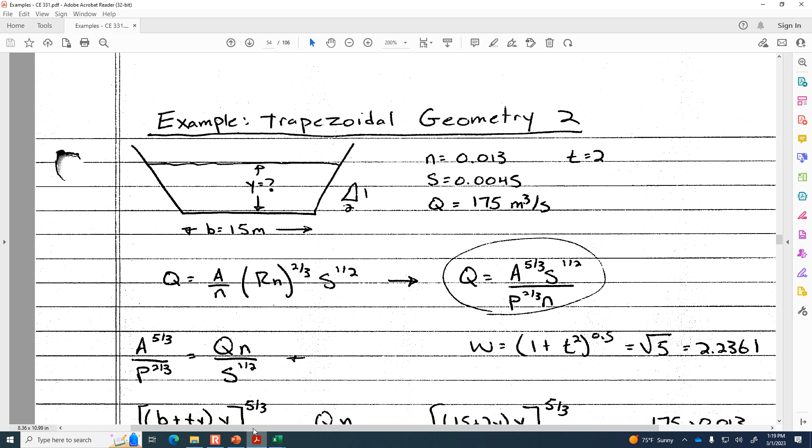14.9 — that's what I got as well. So 14.966 cubic meters per second.

Now on the subject of units, this formula is not dimensionally homogeneous. Do you remember what that means, dimensionally homogeneous? It means the units on the right-hand side of the equation are the same as the units on the left-hand side. This is not — this is an empirical equation.

It's not fundamental. Empirical means it was based on a lot of observation and calibration, and a fitting factor n. Because if we look at the units, we've got meters squared taken to the 5/3 power divided by meters to the 2/3 power, but there's no time parameter there. There's no seconds in slope or in the n value. But yet Q is going to have units of inverse seconds in the denominator as the time parameter.

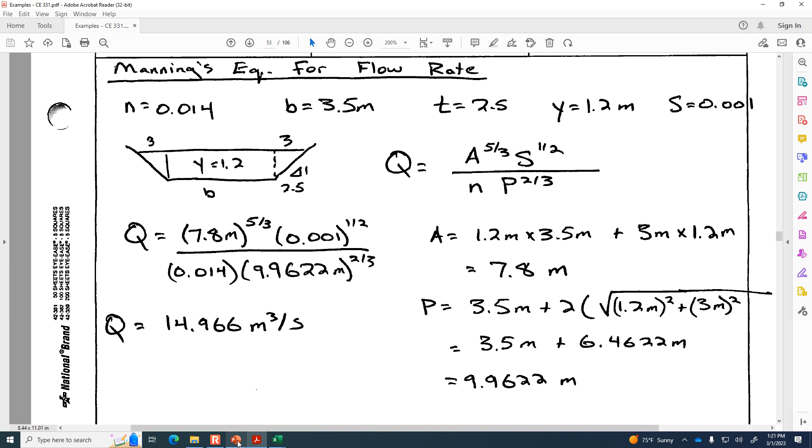So it's okay, it's not dimensionally homogeneous, but we do need to make sure that we're putting in, for example, an area up here where it's going to go to the 5/3 power. And if you've got traditional units, you'd need that 1.486 coefficient at the front if you're using units of feet. Any questions on applying Manning's equation into a trapezoidal channel here?

Now this is the easy kind of problem, because we were solving for Q given a depth — the unknown was on the left-hand side of the equation. It's a little more tricky when we're solving for Y, because the unknown depth is in two different places: in the area term and also in the wetted perimeter term. And especially because if you look at the formula for area, Y appears multiple times. So it's not an impossibility, we just have to be careful when we're putting it into our solver.

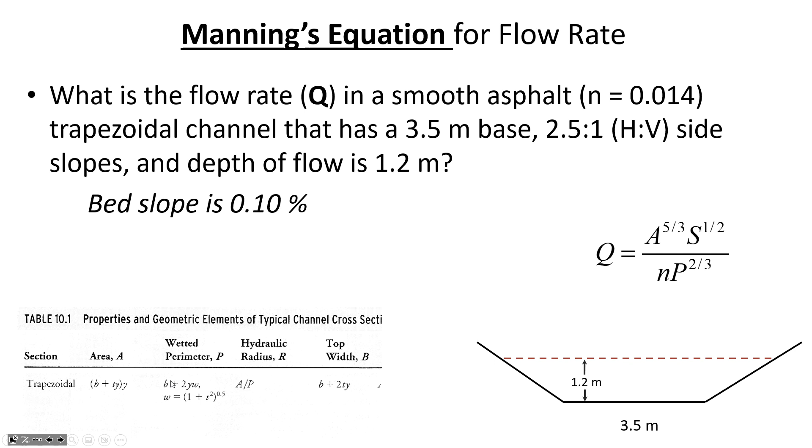I emailed you yesterday a link to a video, and if you're using the Casio calculator, I'd recommend you review it. It's only 4 minutes long, and it'll step you through the process of how you can use the Casio calculator to solve for an unknown depth. What makes it a little tricky with the Casio is that it doesn't have a full keyboard of all the letters of the alphabet. One of the things you have to do is map different variables.

So for instance, on my calculator I can use Q, B, T, S - it has all those letters, but the Casio only has a few of them. So you have to say, well, I know that I use Q as flow rate, but Casio doesn't have a Q on the keyboard, so I'm going to assign it the variable A to represent flow rate. Once you construct the equation using the variables you do have, you can put in an actual number for all of them except one, and solve for the unknown variable. That's what a solver will allow you to do.

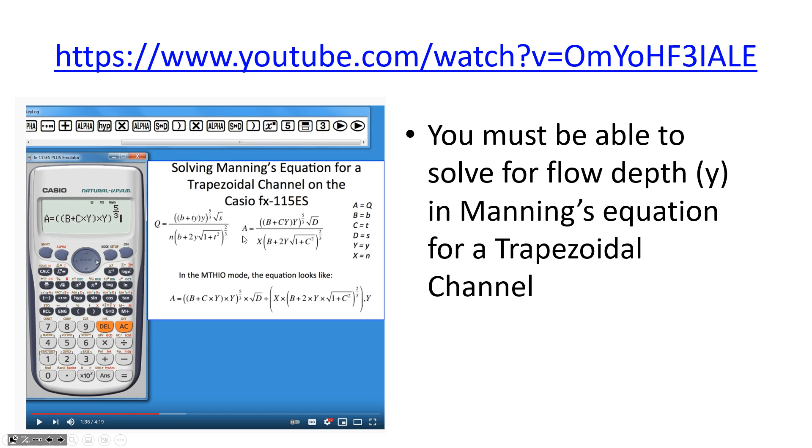We're going to look at a kind of solver today. We'll use Wolfram Alpha just as an illustration, but you'll need to do it with your calculator for an exam and maybe even for a quiz before the exam. So whether you're using a TI, a Casio, an HP, or some other kind of calculator, you need to be able to solve for the unknown depth in your solver.

Okay, so again, here is Manning's equation, both in terms of SI and British gravitational units. Finding the unknown depth is oftentimes what we're trying to solve for with Manning's equation.

For instance, you'll know a flow rate, and you're trying to figure out how big the canal should be. If you're designing an irrigation canal, and someone says, well, I need a certain flow rate, maybe 5 cubic meters per second going through a canal, and I want it to be 3 meters wide - how deep would the flow be? So that's a pretty standard problem, solving for the depth.

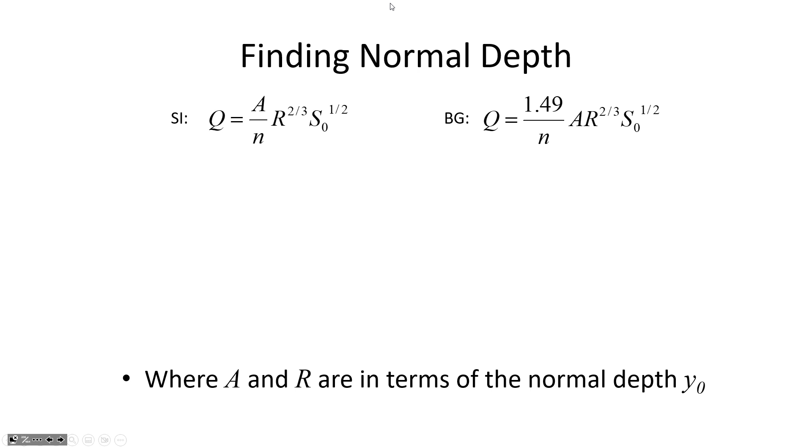One way for us to do it if we're solving with Excel is to rearrange Manning's equation so that all of the known factors are on one side and all of the unknown factors are on the other side of the equation. Then we iteratively guess for the unknown depth until the left-hand side of the equation equals the right-hand side.

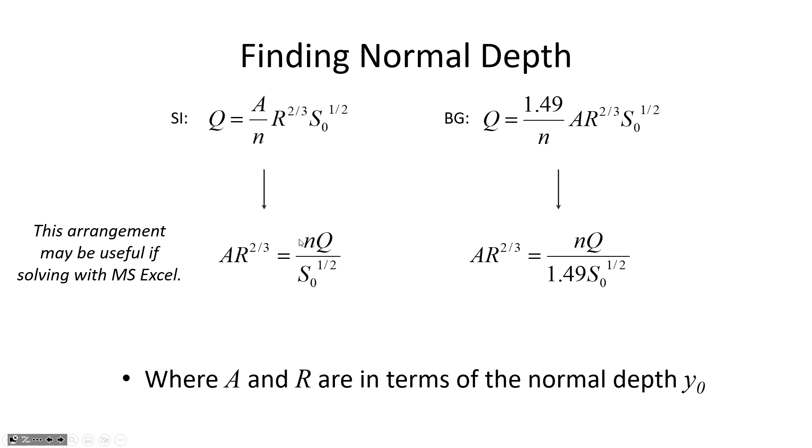So in addition to using Wolfram Alpha to solve Manning's equation today, we're going to look at an example where we'll use Excel and rearrange Manning's equation in this way, where all of the variables that depend on y are on the left-hand side of the equation, and the known factors like the flow rate, the roughness, the slope, all of that will be on the other side of the equation.

Okay, so here's an example where we're going to use a solver and also Excel to try and find out what is the unknown depth y, the normal depth. Assuming conditions are steady and uniform, what is going to be the depth of flow in this trapezoidal channel?

You can see 15 meters across the bottom, with side slopes of 1 unit of vertical for 2 units of horizontal, so T equals 2. Flow rate of 175 cubic meters per second, slope of 0.45%, and this must be made out of concrete because the 0.013 is a pretty typical n value for concrete surfaces.

Okay, so here you can see I've substituted in for a trapezoidal channel. This is what Manning's equation becomes when we've got a trapezoidal channel. So area, for example, is B plus Ty times y. Wetted perimeter is B plus 2y times W, where W is 1 plus T squared to the 1/2 power. We're going to put all of this into Wolfram Alpha given the known parameters we've got.

So let's put those on the board to begin with. We know that we've got a trapezoidal channel, and Q is 175 cubic meters per second. The slope S is 0.0045. The bottom width B is 15 meters. T is 2. n is 0.013. Let's see, what else is there? Is that everything? Yeah, all right. And the unknown is, what is the depth? What is y?

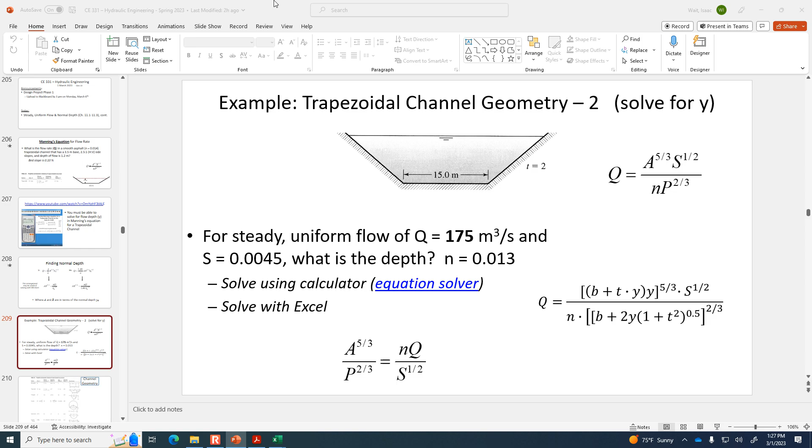Okay, so let me start up a browser here, and if you have a calculator and know how to put in this equation, then do that. If not, or if you just want to see how we could set this up in Wolfram Alpha, then you can follow along as I do that.

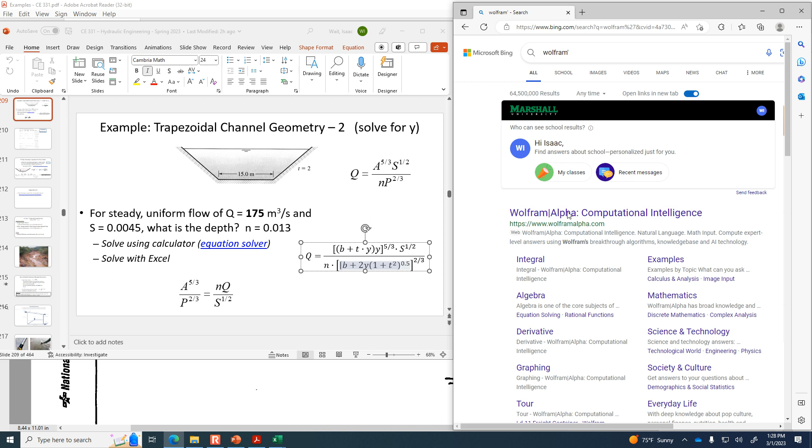I wish I could just paste this equation into Wolfram Alpha, but I don't think it's necessarily that easy. So let me do my best here.

So Q, 175, is equal to B, so that is 15 plus T, T is 2, times Y, our unknown depth, times Y again, taken to the power of 5/3, times the slope, which I know is 0.0045, to the power of 0.5. And then divided by n, so 0.013, times the formula for the wetted perimeter, which is B, so 15 plus 2 times Y, the unknown, times 1 plus T squared, so T is 2, so 1 plus 2 squared, and this term is taken to the power of 0.5. And then one last parentheses, everything to the power of 2/3.

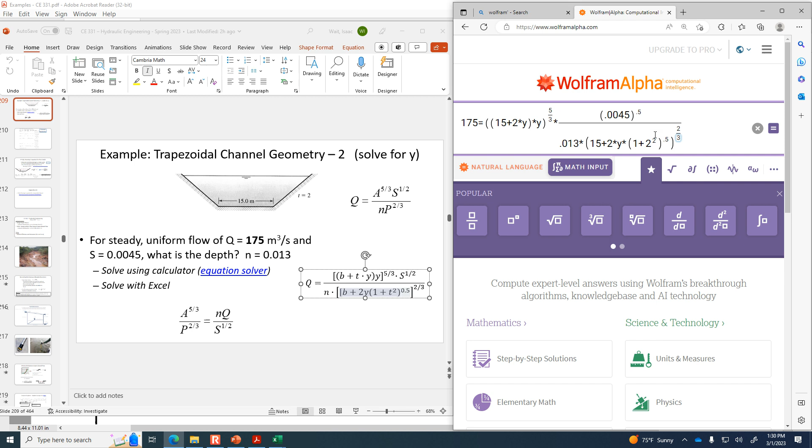I'm just double checking here to see if it looks right. Now, of course, the divided by thing doesn't go all the way over, but that's okay. It's still going to have the same mathematical effect if I divide only the slope by this as the entire expression by that, since it's multiplied here. I think I'll be okay.

So now when I click compute, it's going to go through the step of graphing and kind of restating the formula in a sharper way. And we'll solve down here for y: 1.572.

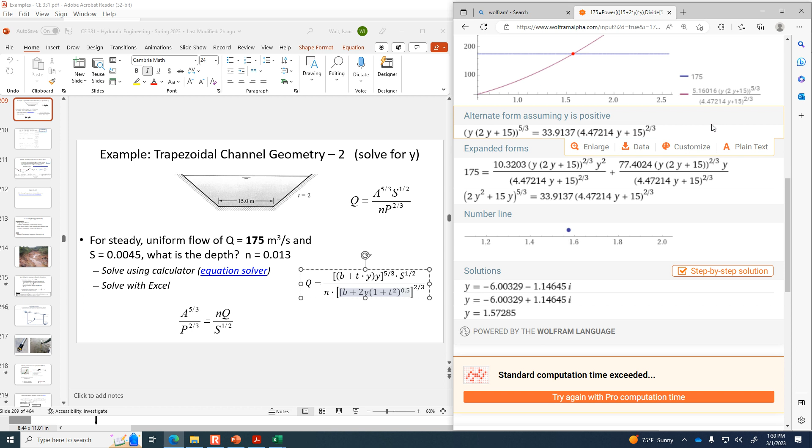Anybody else get the same thing for the depth? That is the right depth, by the way. It's really easy to get one exponent wrong or to type something in incorrectly, but let me bring it up on the screen here.

So if you calculate the W term, then the depth that we're looking for is 1.573.

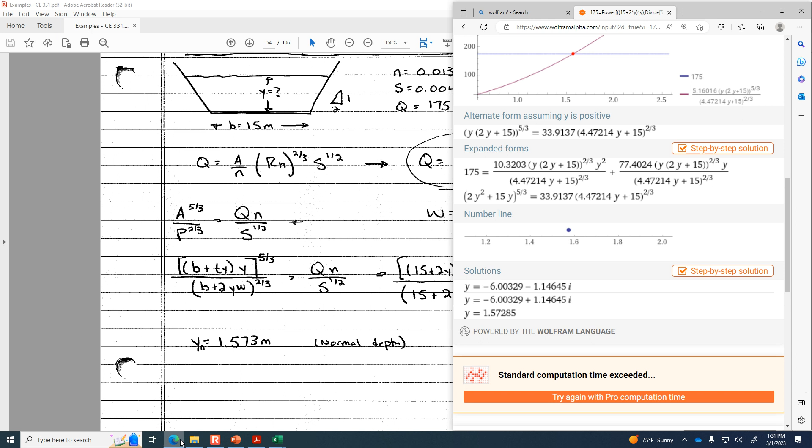So with Wolfram Alpha, I've shown you how to solve this with a numerical solver. Y is in several spots in the equation, so we couldn't just rearrange it algebraically and solve for Y that way. You could iterate, take a guess of Y and keep changing things around, and that's effectively what we're going to be doing with this.

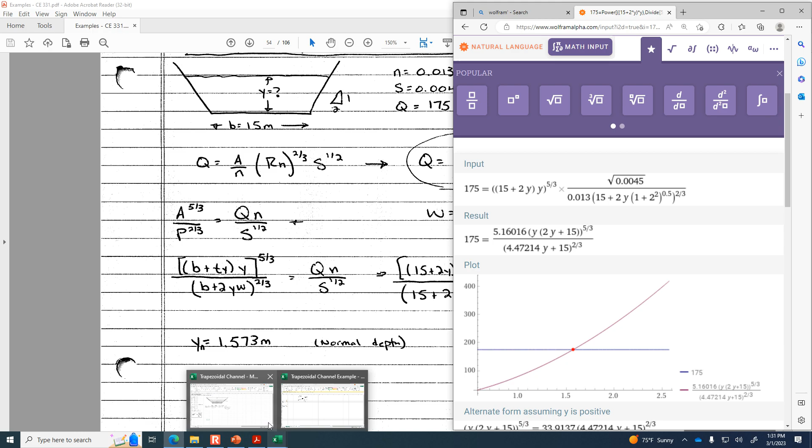So here's the same example now in a spreadsheet. You can see I've got the formulas for everything. So let's put in what we know: 175 cubic meters per second, and the B value is 15. The roughness is 0.013. The slope is 0.0045. Side slope is 2.

Okay, so now W I'm calculating with this formula here. Let me make it a bit bigger. So it is 1 plus T squared, to the power of 0.5.

So we got W. And now for Y, I'm just going to have to guess some number, so let's say maybe it's 1 meter. I'm going to use goal-seek to change this guess, continually adjusting it until this target cell, where I'm finding the difference between the left-hand side and the right-hand side, is 0. So I'm just starting off with the guess of 1 meter.

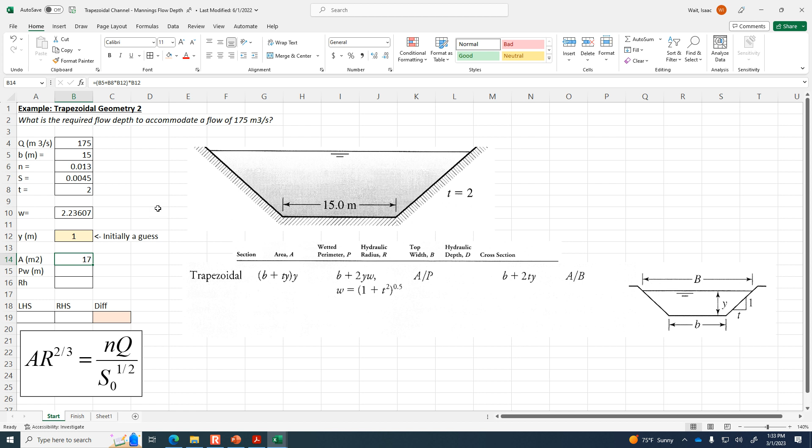Okay, so if the depth is 1 meter, then what would be the area in that case? Here I'm now going to use the area formula, which is b plus ty times y. So it is b plus t times the guess of y, times the guess of y. So if the depth is 1, then the area would be 17 square meters.

Wetted perimeter: here's our formula for wetted perimeter, B plus 2y times w. Okay, so again, this is just a contingency calculation, all depending on if the depth was 1.

So then the hydraulic radius is the area divided by the wetted perimeter. Now by LHS, that means left-hand side of this equation. So the left-hand side of this equation is the area times the hydraulic radius to the power of 0.6667, that's the 2/3. That's the left-hand side. The right-hand side of the equation is n times q divided by the slope to the power of 0.5.

So now I've got the right-hand side of the equation, and it's constant. It's not changing because y does not appear on the right-hand side. So when I change my guess for y, it's going to update the left-hand side, and what I want is the difference between those two to be 0. Because when the difference is 0, that means I have the depth that will make this expression equal. So for example, if I switch from 1 meter to 1.2, it gets closer. The difference is getting smaller as I increase y.

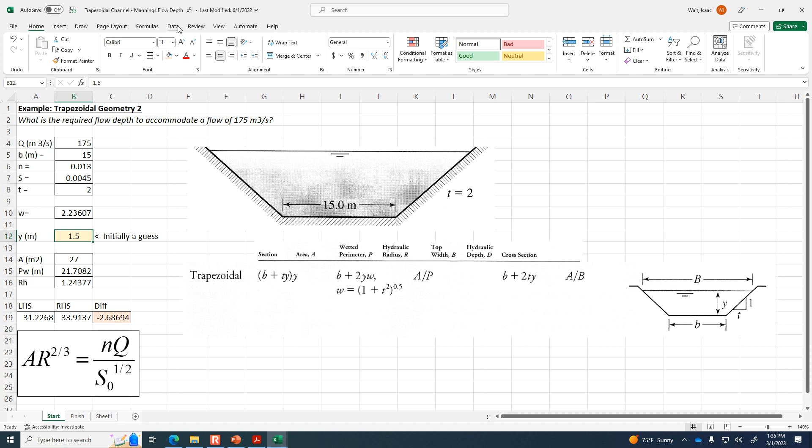And what we want to do is have the solver with goal seek say we want this cell to be 0 by changing the depth. As soon as we let it do that iteration, it minimizes the difference and finds the depth should be 1.572 meters, the same depth we could calculate using the solver.

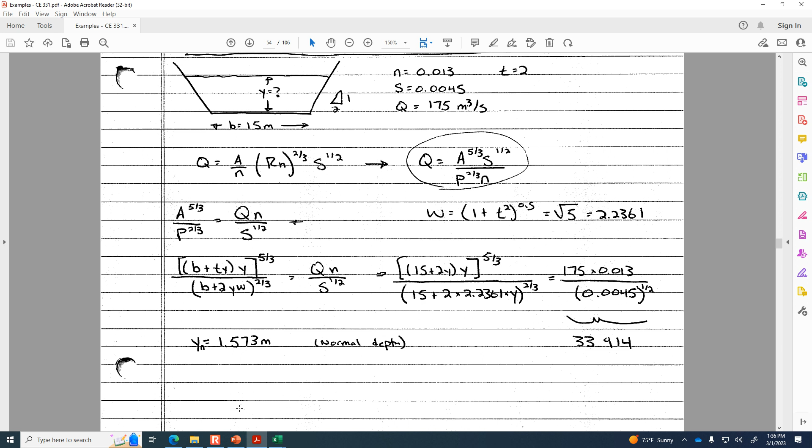This is something that's going to recur again and again from now until the end of the semester, needing to solve for the normal depth in a trapezoidal channel. I hope you'll get really good at it because you're certainly going to get a lot of practice. Whether it's using Excel or the solver, actually both, you need to be able to do it both ways. You should be able to solve for the depth in a trapezoidal channel when given a flow rate, bottom width, side slope, channel slope, roughness, and so on. Any questions about that?

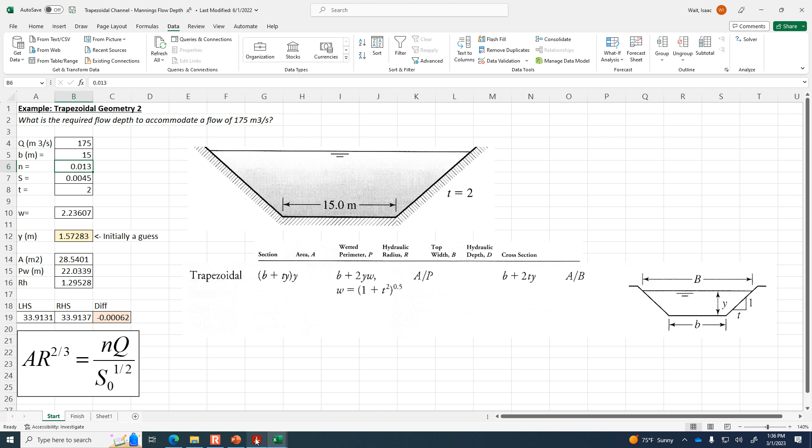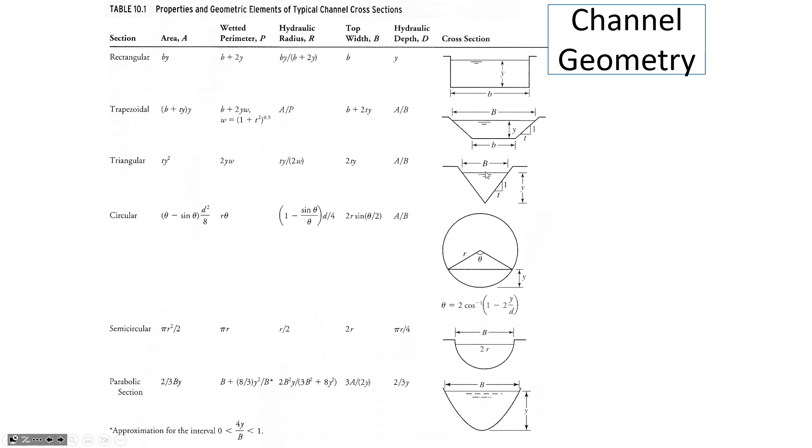Okay, so now let's get a little more practice. I'm going to give you this one. I'm going to stop talking, just pause for a moment, give you a chance to try things out. Whether you want to use Excel, you can get it out if you want. I'll bring up that spreadsheet template just to show you and remind you what it looked like. You can use your computer, go to Wolfram Alpha, or do it on your calculator. But using one of those three methods, I'd like you to find out: if we have 29 cubic meters per second going through this channel that has a 3.5 meter bottom width, then what will be the flow depth? What is y? Solve for the normal depth.

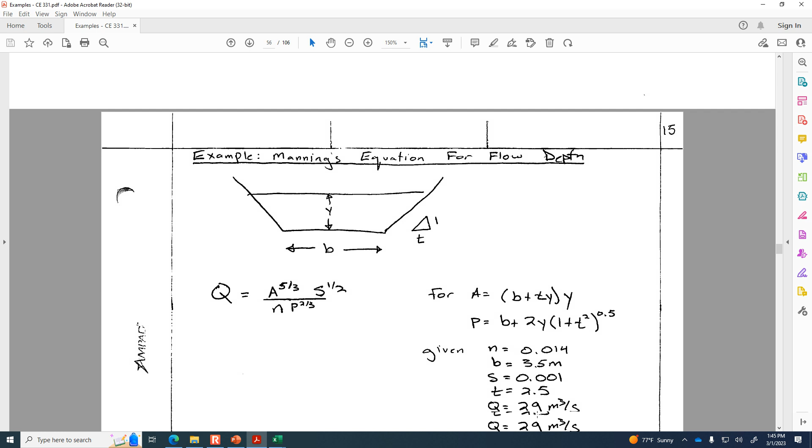Okay. So if you use the solver—well, either way you do it—I think you should get that the depth is 1.66 meters approximately. Here you can see the substitutions that I made into the equation. It's sometimes a little bit easier to see everything written out by hand than it is on the spreadsheet.

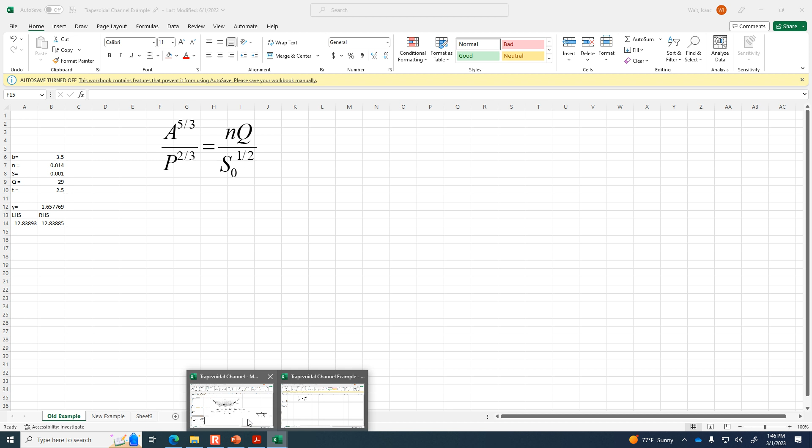So let me do it by the spreadsheet now as well. Okay, so for our flow rate being 29, the bottom width is—I guess in this new example we're looking at—it is 3.5.

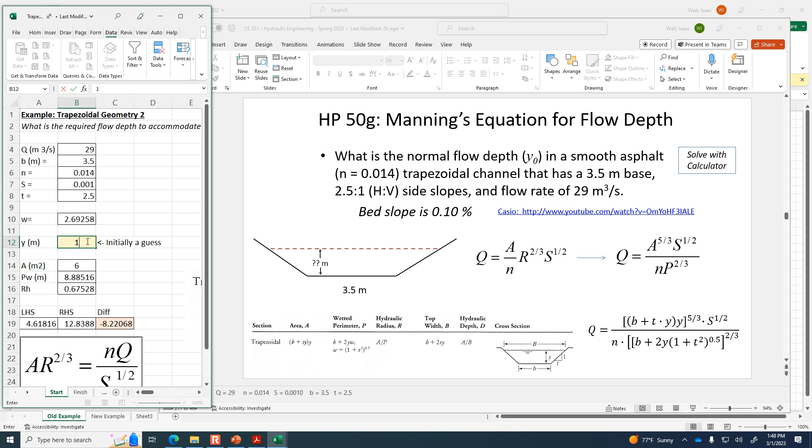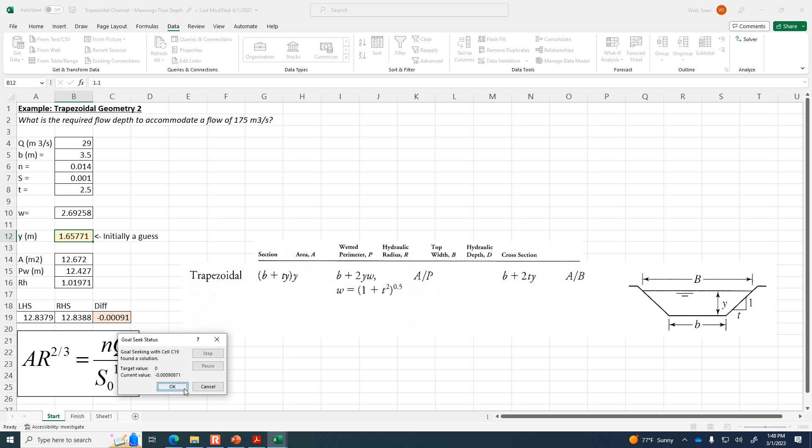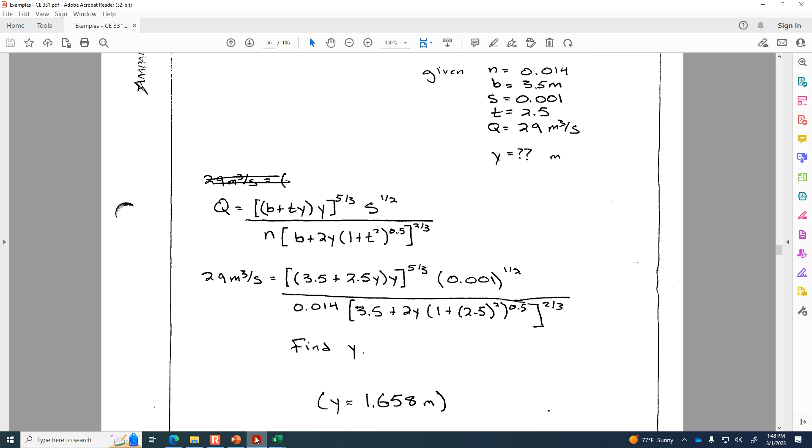Okay, 1.657. So that kind of confirms what I got through the solver as well. All right, so we did 3 problems today with trapezoidal channel geometry and Manning's equation. You'll have some more practice on the next homework assignment, which I'll get loaded into Blackboard, but I think the more immediate thing on your agenda is the demand estimation.